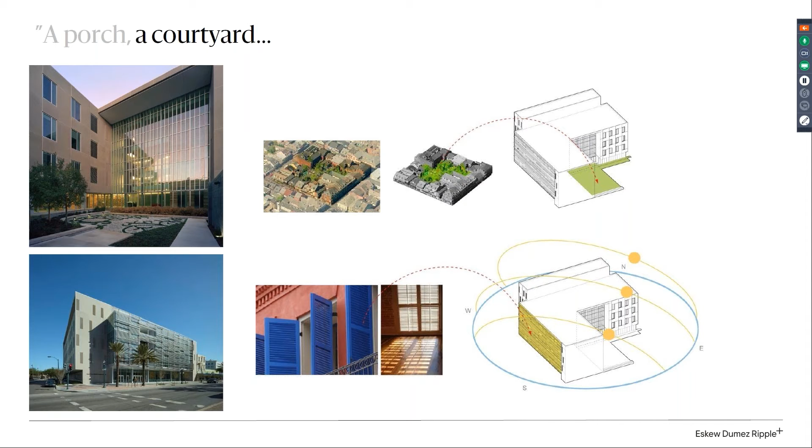And then a water feature - we took all the water that came down from the roof of the building and fed it into these water features that float along. We recirculate it with a little pump, which aerates and cleans the water. When the next rainfall comes, it overflows into a system that injects it into the parking area, which is up on crushed stone to get the elevation right. That acts as an 80,000 gallon rainwater detention facility that then drops the water back slowly into our soils.

Why is New Orleans sinking? Because we so energetically pump the water out of our streets and off our sites to make it drain. But like a sponge on your kitchen counter that's left to dry out, it gets thinner. So if we can keep the soil moist, we can keep the buildings up.

So that's an example of something that was seen as wacky - it was the first pervious concrete installation in the state of Louisiana when it was built. But when the city of New Orleans announced their new comprehensive zoning ordinance requiring pervious concrete and pervious pavings, they held the kickoff event at the Bioinnovation Center to say, look, it's here - and it was actually cheaper to do than a conventional system.

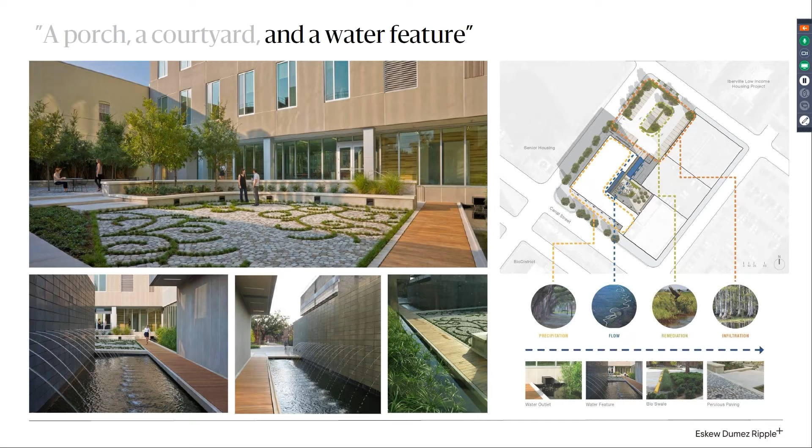So we are in New Orleans and we are of New Orleans, but we work now everywhere - about half of our work is around the country. We have two international projects: a performance hall in Sao Paulo, Brazil, and right now we're working on an affordable housing mass timber project in Vancouver, British Columbia. But in general we're working across the country in all kinds of different building types. We try to take that way of looking around and connecting people to culture and climate - that's our theme, how do we bring that into other places where we're working?

So this project just won the National AIA Education Award - it's the Thaden School, funded by the Walton Family Foundation. It's an independent school which tries to tie people back to the land in their direct experience and make their education, grades 6 through 12, stick better. It's named in honor of Louise Thaden, the aviatrix who won the national cross-country airplane race in 1936, but was born and raised in Bentonville.

It uses this pedagogy of studying how you grow things, and then the biological transformations when you cook things, in its meals program. So it's a high school with a culinary program. It teaches kids physics and engineering, and then you have to build the bicycle you use to get to school - that's called the Wheels program. And then you learn the art of writing, storytelling, and making videos - that's the Reels program. So: meals, wheels, and reels.

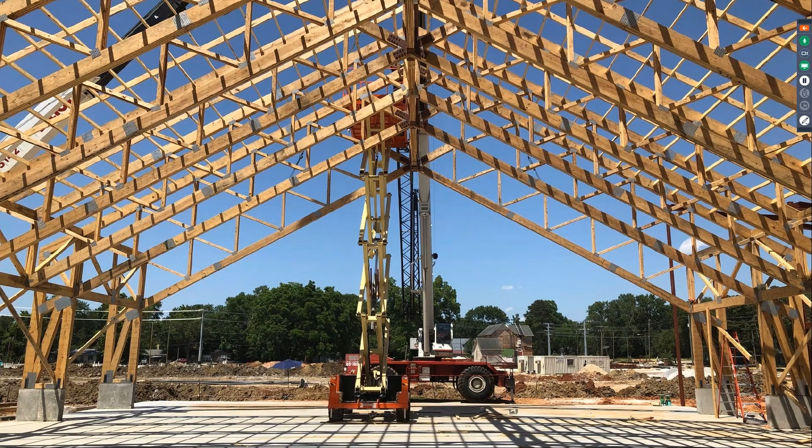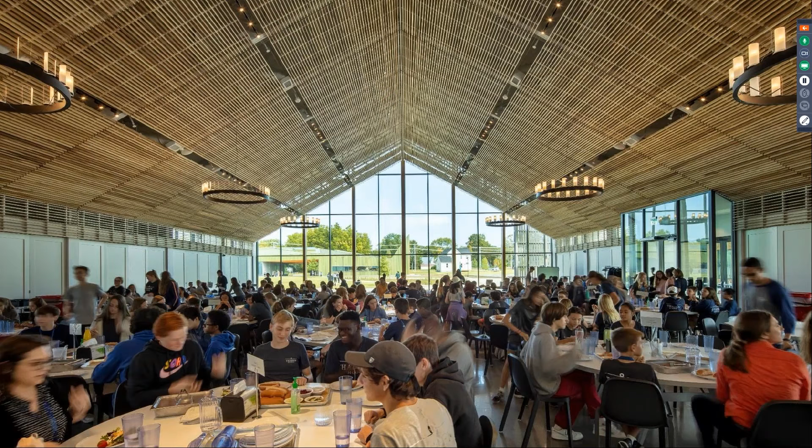What we did was look at that way of building and said, we're from New Orleans, so learning and community happen around food. So instead of building a big auditorium, what you should build is an amazing dining hall that begins and ends your day at the middle. You bring people together there. And so that turned into the gathering spot for this school, built out of cheap dimensional lumber.

So we're building this school with an energy use intensity of about one-third the typical school, with ground source heat pumps and all kinds of fancy stuff. We're building for $200 a square foot, yet producing a space of this kind of cathedral-like quality.

So, but again, we can't help ourselves - it's got a porch, a courtyard, and a water feature. And that water feature is part of the pedagogy - it's where they teach students about hydrology, about how plants actually clean the rainfall and clean pollutants out of what's gathered on the rooftop, and so on.

So we build all these different building types: live-work, residential projects, office projects, co-working spaces, learning environments - that's K-12, university buildings, research laboratories - and cultural and civic, which means things like parks and so on.

About 9 years ago, another member of staff came up with a wacky idea, saying: we have two pretty good universities in our region, but we're competing against firms from places like Boston that have a slew of great universities around them. We need to be doing research, but we can't count on the universities to do it.

So how could we promote research within our own practice? Each year it's like listening to This American Life — we pick a theme and have stories on that theme, from the world of architecture and the built environment. There are 20 great books; you read all of them and tell us which 3 we should read. There are hundreds of articles on that theme; you read them all and tell us which ones we should do. Present them to us every 6 weeks — you'll have a talk, a lunch and learn internally. Themes range from building performance to resilience to health in the built environment, tools for community engagement, building envelope design, and so on. This has really pushed us forward.

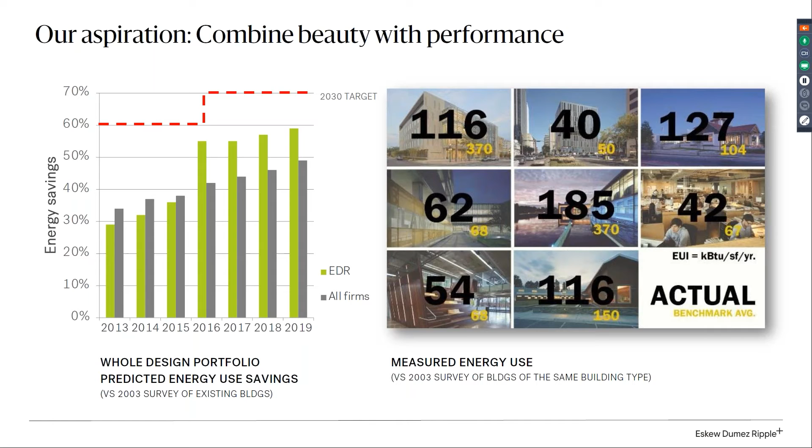So we feel good about that, but we all know, especially when I was giving the lecture this morning, the world's on fire. We're facing a lot of problems everywhere: climate, culture, the divisions in our own nation and in nations all around, putting everybody at each other's throats. We've invented an amazing set of technologies that make people mad, right? Facebook's algorithm is built so that if you use an angry emoji it gets promoted up the chain much heavier than if you use a smiley face, because they know that's a way to get people to spend more time staring at Facebook. So we've invented these perfect technologies for dividing us apart at the same time that our climate's in real trouble and we're headed towards a lot worse phase. So what are we gonna do?

Well, before we go there, I want to make you feel better, and I have to give this pitch to students especially, because students are at an age where they've seen so much bad news about where we are that they get despondent and disconnect. So I think it's important we step back and say, actually, we're making great progress on a whole bunch of fronts. It's not like we can go back to sleep, but we should take credit for what we're doing right. The first one is we are eliminating poverty.

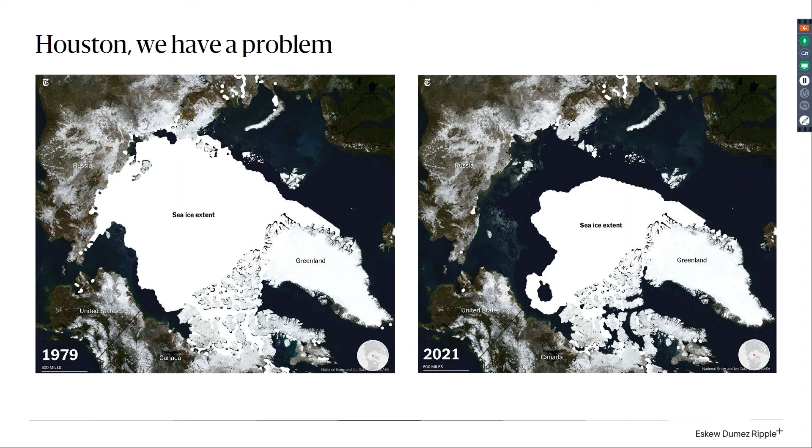As the Minister for Oil for Saudi Arabia observed, the Stone Age did not end because they ran out of stone, right? The oil age will not end because we run out of oil. The oil age will end because we come up with something better and cheaper.

The things that we've done are devastating wild populations. We're on track to lose half of all species. Bird populations, what my wife studies, bird migration, it's all connected, and bird populations are collapsing. Insect populations are collapsing faster, and it's the insects that pollinate half the food that we ate today.

And so if we don't get a handle on that, how do we get there? Now, everyone's good at making a promise, and at COP26, people started passing this around on social media: 'Man announces he will quit drinking by 2050.' So it's easy to make a commitment very far in the future that you will live a more virtuous life.

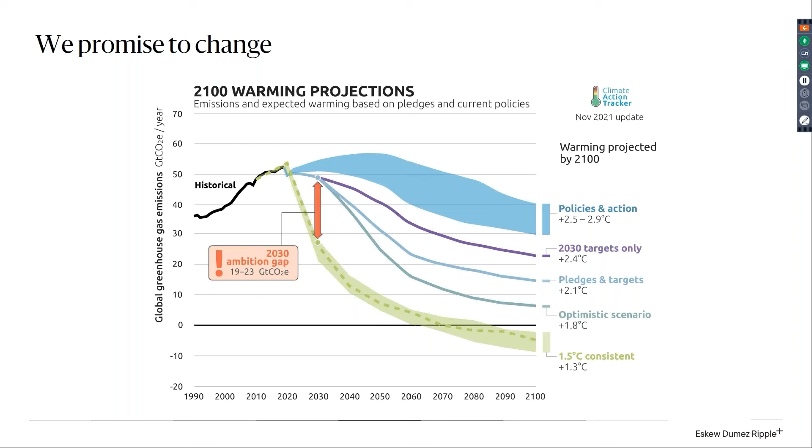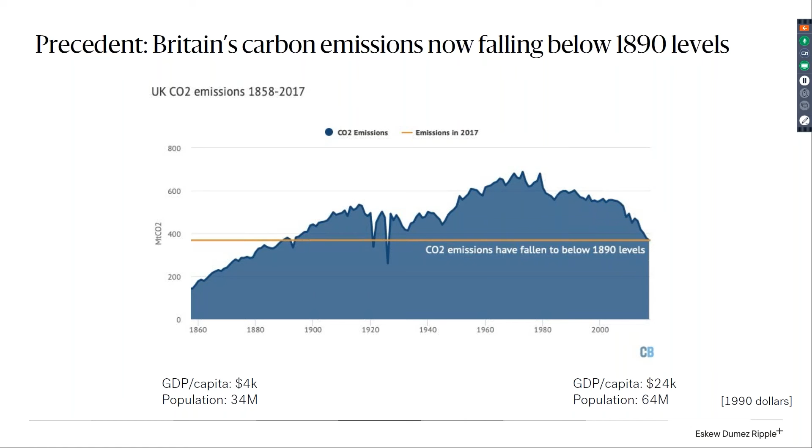In Colorado, the local utility held an auction for the cheapest source of power that could be bought in 4-hour increments. One of the competitors was running the existing coal-fired power plant they already owned and had already amortized, but just had to pay for the coal. The other one was building new solar panels and batteries, and the solar panels were cheaper. So that's what they signed up for.

This is the Kentucky Coal Museum, whose utility bills were driving their affordability concerns, so they installed solar panels on the roof. So when you visit the Kentucky Coal Museum, you're having a solar-powered experience.

And then you let them take a 2nd time and a 3rd time. The mice will learn. And what happens is with the logarithm of the number of tries, the time or the cost goes down linearly. This is called by economists the experience curve, or the log law of learning.

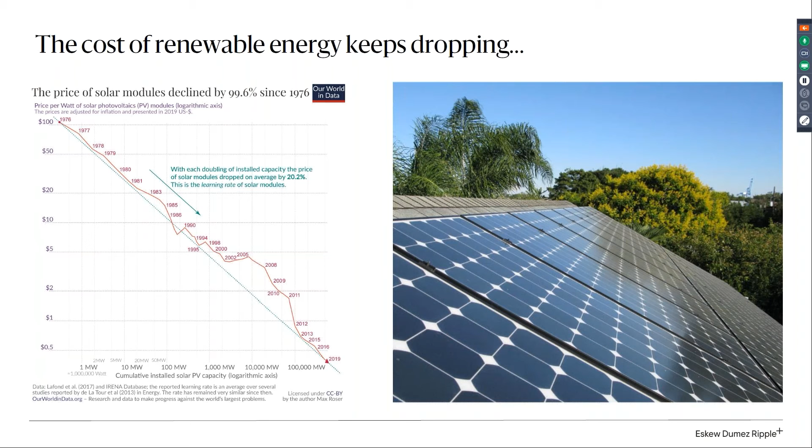So this is nothing weird or magical. This is what allows you to have more computing power than went to the moon in your pocket. It's that same kind of learning. This is what humans do, and we can be pretty proud of it.

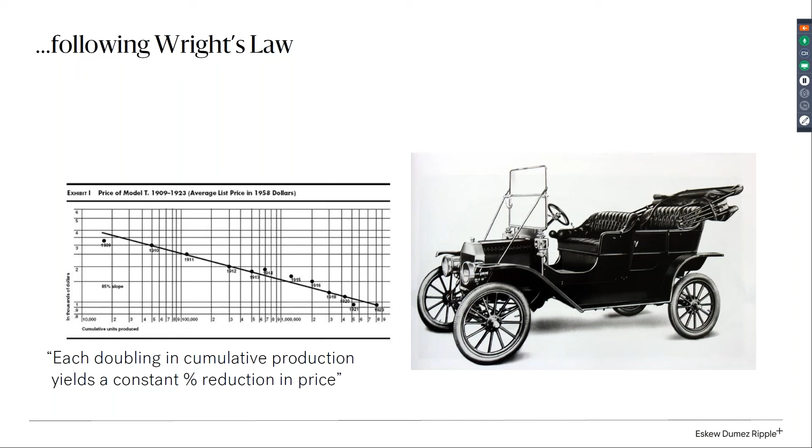So the point is, no one is building coal, and very few people are building natural gas. The future is renewable. The grid will decarbonize, not just because it's socially the right thing to do, but because it's actually cheaper, since we're all running down these experience curves.

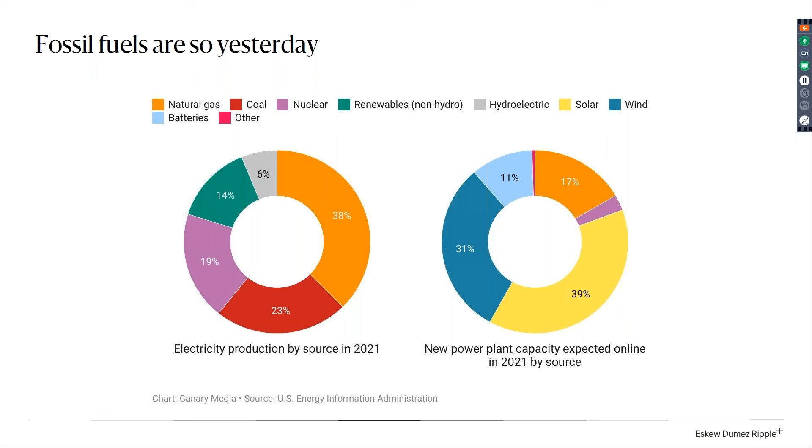So if you make an all-electric building today, even though that electricity may come from a coal plant that's slowly becoming too expensive to run, it will be a carbon-neutral building when it's done, as the grid decarbonizes. That's part of the reason you'll hear more architects saying we need to electrify everything. But waiting for that electricity to fully decarbonize is a 30, 40, 50-year process.

We can't wait that long. Luckily, strangely, architects are at the front lines of what you can change, because architects have design control over about 30, 40, 60% of all carbon emissions on the globe.

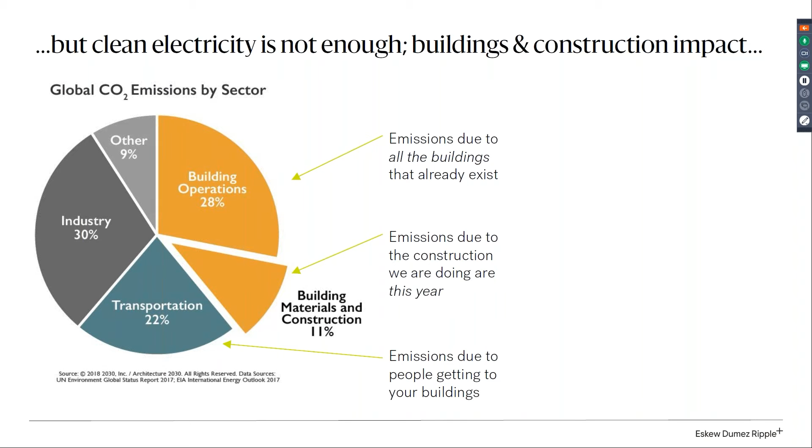And we can go through and do deep transformations of existing buildings to radically reduce their footprint and prepare them for the clean electricity future.

So 3 years ago, the last time the AIA all gathered in person, there was a floor fight. I grew up in Chicago, where political conventions and floor fights were the most exciting thing you could imagine. The board wasn't ready to go there, but a group of architects put a resolution on the floor.

The resolution said: we as members of the AIA recognize that the climate crisis is real, and that we have a responsibility and a huge, mouth-watering business opportunity to be part of the transformation, with a set of steps for doing it. That got put on the floor, a bunch of people testified, and they couldn't find anybody to testify against it. So they called the question, and it passed with 93% of the vote.

This resolution commits us as members of the AIA to advancing the 2030 Commitment in all our firms, and to transforming what we used to call the COTE Top 10, the 10 attributes of great environmentally responsible buildings. The marketing department got involved, and we're renaming this to the Framework for Design Excellence.

So how we define excellent design is not just pretty pictures. Yes, is it beautiful? Does it fit in with its setting? But also, what energy does it use? What are its carbon emissions? How does it handle water?

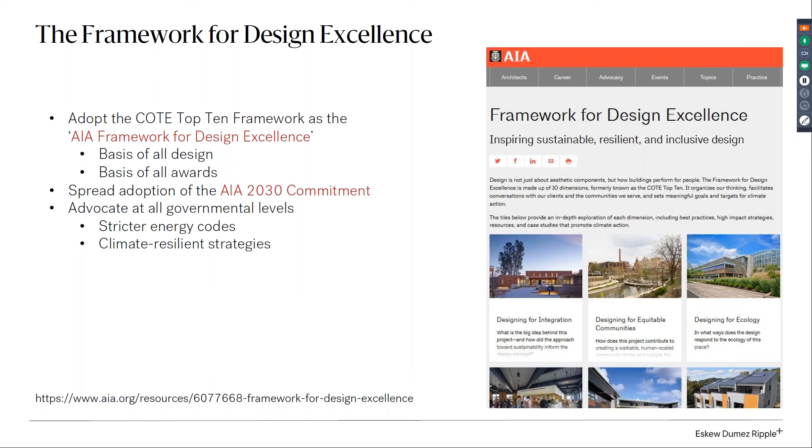And more importantly, we're all busy people. So what if I'm just doing a little project? I'm not going to win a COTE Top 10 award with this refit of a restaurant. What can I do? What it tells you is if you're busy and you can only do one or two things on energy, here's the one or two things that'll probably have the biggest impact, and so on. So it's a really quick grab bag of great resources.

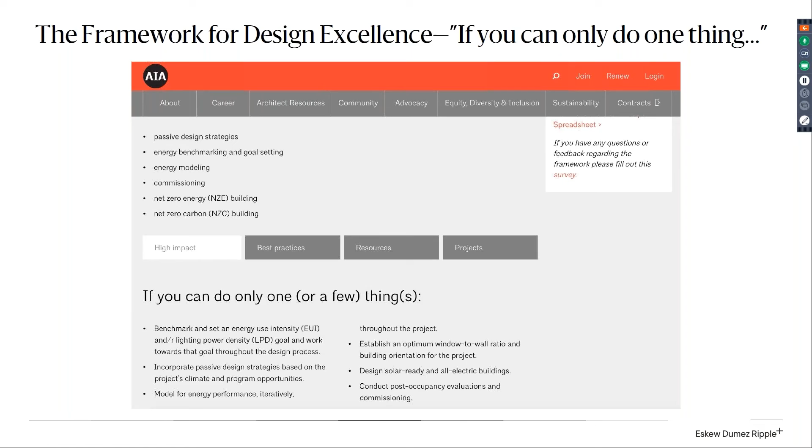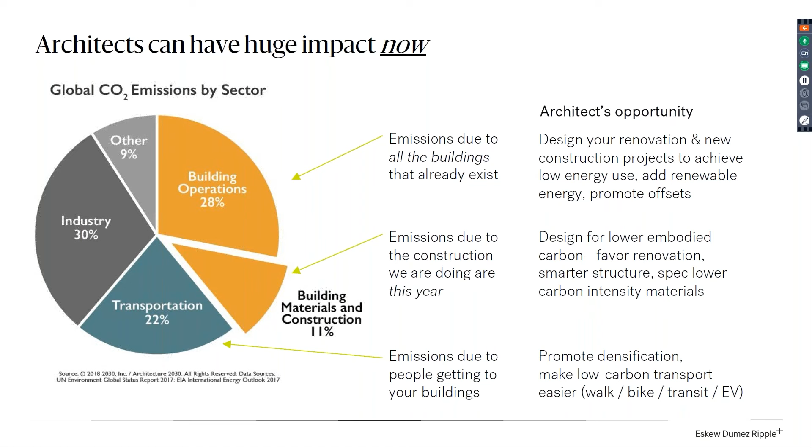So again, what are our opportunities as architects? We can transform existing buildings. We can design for lower embodied carbon, the carbon emissions from how we pick our materials, and we can make low carbon transport easier. I'll show a little bit about that in a minute.

So as I like to say, architects are powerful beings, because we are small in size. No one thinks the architects have control of 60% of the globe's carbon emissions, but we're there. And it's a giant fire hose of money being spent. And if we can nudge it a little bit through our role as kind of shepherds of the built environment, we can have a really amazing transformational effect.

So I'll give you some case study examples. The points are: design for health, deliver efficiency. We find with clients, especially in the Deep South, they're not actually interested in sustainability, but they're very interested in the health of their employees and the productivity of their employees. It just turns out that design that promotes those things makes more environmentally responsible buildings. Electrify everything, transform existing buildings, design for economy, and cut embodied carbon. I'll show you some examples of how to do that.

Promote what's being called now the 15-minute city. What if you could get everywhere you really needed to be on most days within 15 minutes, preferably by walking or biking or public transit, maybe in a private car if that's the only way.

And then I'll encourage you to recruit all your competitors. They're your best allies in what we're trying to do here, because this is going to be hard. No one of us can do this alone. And to stand up, I had the pleasure of meeting some folks here who, as architects, are citizen architects, speaking up in their communities and helping lead their communities in these transformations.

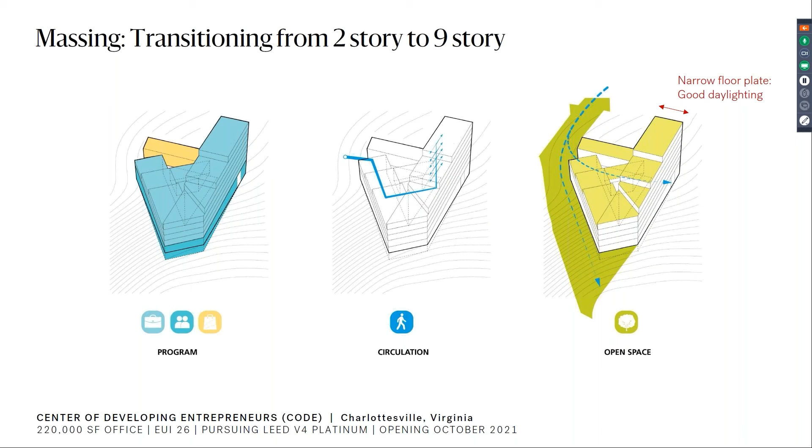And those can be outdoor gardens and so on, and that's part of the rainwater control system that met the city's stormwater management. Everyone else is building big tanks. We don't need that, and so on.

Also, we went through and designed it with operable windows. And it's always a fight. People say the mechanical engineers fight you and they say, oh, you'll de-balance my system, you'll do this, you'll do that. And we designed it with operable windows.

During value engineering, you know the process where they get rid of all the valuable things in your building, they said, oh, we're just gonna go to fixed windows. That'll save us $800,000 on this $80 million project.

And we said fine. And then the next week they said, COVID. We have this COVID thing, what are you doing about COVID? And it turns out the single most commonly recommended thing from all the experts, when they finally figured out it wasn't surfaces so much as it was airborne particles, was open the windows. And suddenly they became great advocates for operable windows again.

And then we got a call. This is a text from our PA visiting the site last week, and he said the project manager for the owner was complaining about all the headaches and deliveries and things that are behind schedule. But then he went outside and there were bees. Bees have already set up and they're using all the flowers. And it's like, we're building something amazing here. And he said that made it all worth it. So he sends me this picture of the operable windows we fought so hard for, with a little love sign next to it.

So again, because we can't help ourselves, this project has a porch, a courtyard, and a water feature.

Now, one of the questions they asked us, they got very interested. There's a lot of low carbon investing, and the investor behind this building said, how can I think about this building from its carbon perspective? And we said, look, there's a giant burp of carbon at the beginning because you're building this building. And then there's the carbon emissions that happen because the power plants that feed the building are emitting carbon.

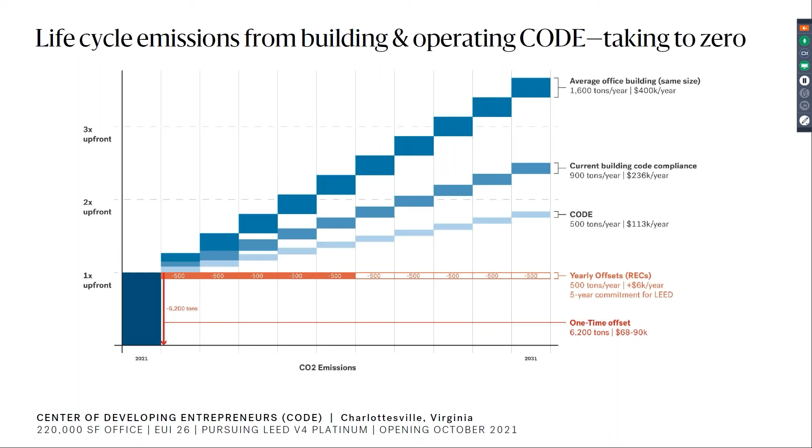And so he said, oh well then I'm just kind of right there, and I've got carbon neutral operation. He says, yeah, but what about that big burp you told me about at the beginning? And we said, well, maybe what you want to do is restore.

And so we developed a set of proposals around urban forestry, here's how much it would cost. Charlottesville, in all the wealthy sections, has a beautiful urban forest canopy, but in the poorer sections it does not. And we said, here's what it would cost you to basically do a massive intervention where you're building social equity, you're offsetting carbon, and you're making for a healthier community. And showed them what that would cost.

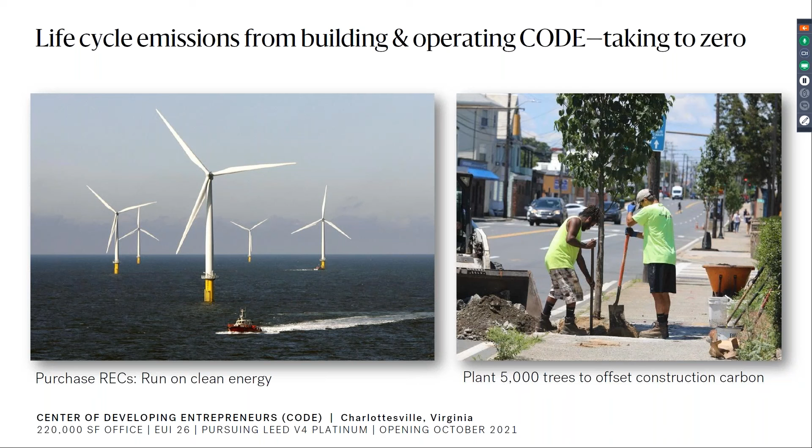And again, the cost of doing that offset program would be remarkably small, so $68,000 to $90,000 for an $80 million project. So that was new construction, that was fun.

What about ugly buildings? There turned out to be an oversupply of them. I won't say they're a renewable resource, but they sure are everywhere.

So this is in Baton Rouge, gentleman born in Baton Rouge, this is a Baton Rouge office building. This is run by the, what's it called, the Workman's Comp, one of the nonprofit Workman's Comp Corporations.

And they said, we have this problem, we don't know why. People are really uncomfortable thermally, it's too hot or it's too cold. And every time we hire a millennial, they run and leave within 2 years. We can't hold on to them. And I said, have you looked at what your office looks like? And they said, you know, the future of Workman's Comp is mostly about occupant health. It's not about like, are you hurting your back because you lifted something heavy?

We have robots for that, right? So what we said is, how about making your building the test bed for a healthy design, a healthy office that promotes activity, promotes health, and better air quality, better human activity.

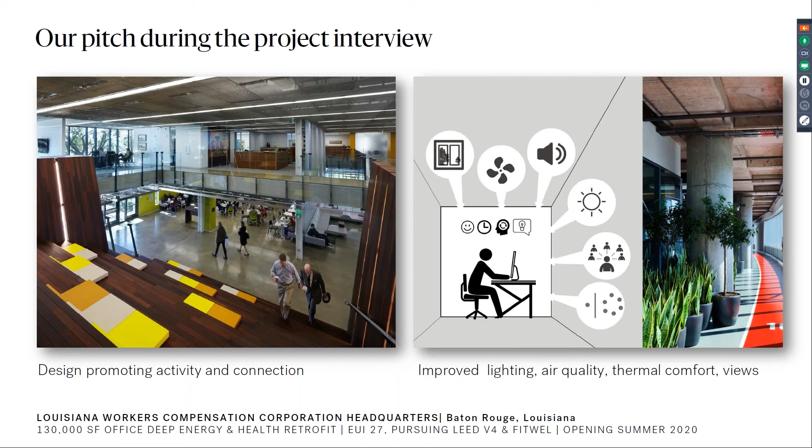So they bought that, and we told them about this crazy study out of Harvard that showed that compared to conventional office air quality, if you get rid of all the VOCs, all the off-gassing from the nasty plastics, and then you double the amount of fresh air per person, but only have it there when people are there, you can have significantly improved cognitive performance, mental function, and the cost is like $20 a year per person.

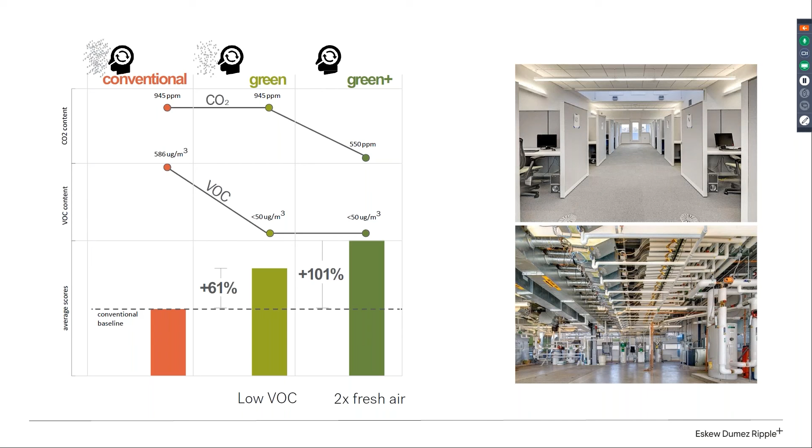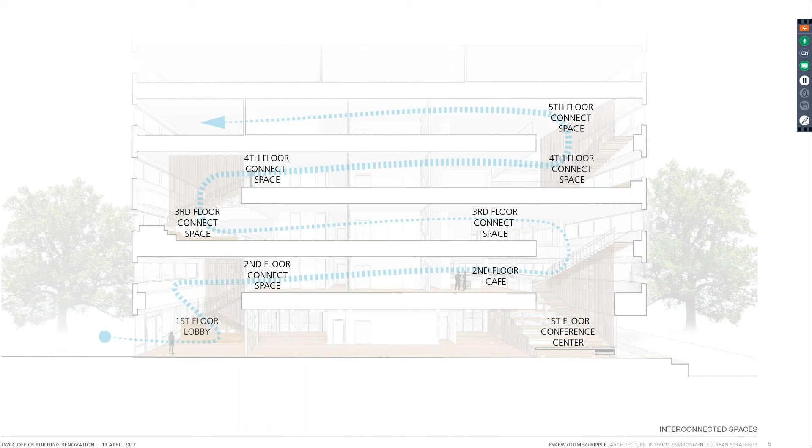And they bought that. So we did this series of interventions while they were in the building. They freed up 1 floor at a time or 2 floors at a time, and we worked our way through the building, creating a way to move through a 7-story building without using the elevator. So the president claims each morning she comes in and basically gets to tour all her departments on her way to her office on the 7th floor.

This building cut their energy use to a third of what it was before, at significantly better air quality and a significantly better experience.

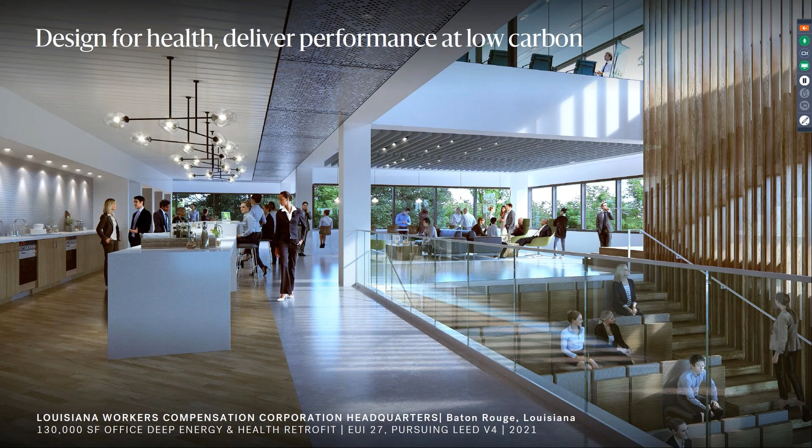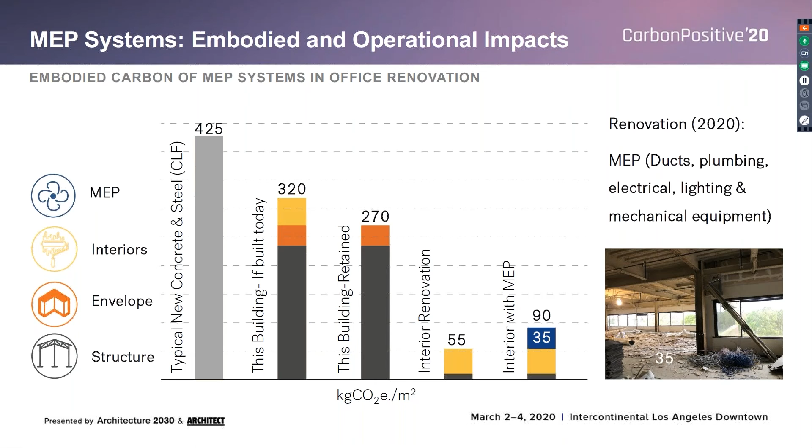But the nerdiness is, here's the carbon footprint of a typical building, constructing a new one. If we took the plans and ran it through a computer model of what the carbon emissions were for rebuilding that building, but then said, no, we're going to leave the structure and the envelope, and just rip out the interiors and redo it, and then add a fancy new mechanical system. Here's the burp from when you built it, and it's such a pig that it was all dwarfed by the operating carbon emissions per year.

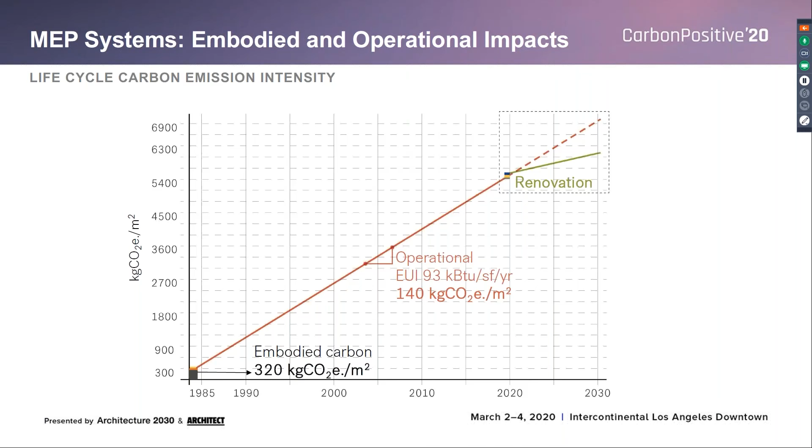This is time to the right, the horizontal axis. Here's that renovation. In less than 1 year, the building's efficiency was so much better that all of the carbon that went into all of that renovation work was saved by the operation of the more efficient building.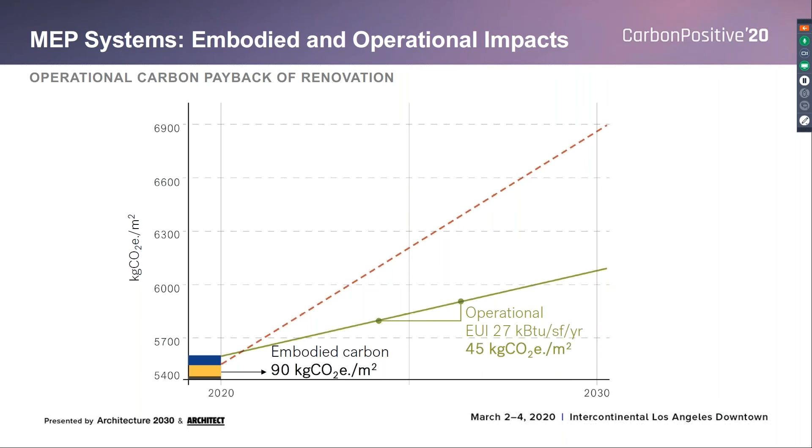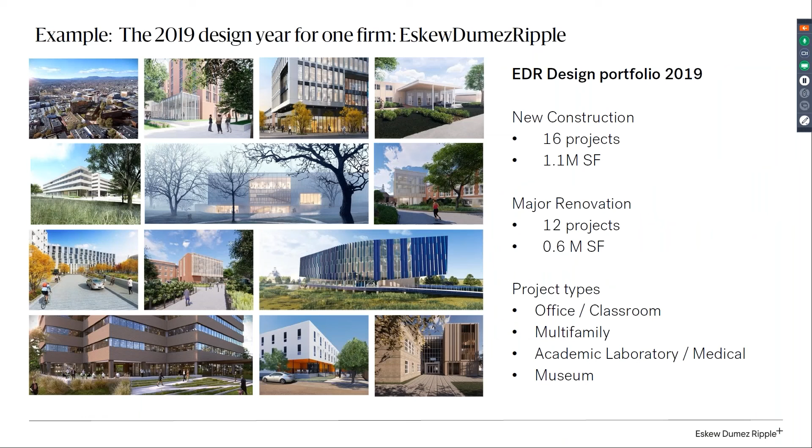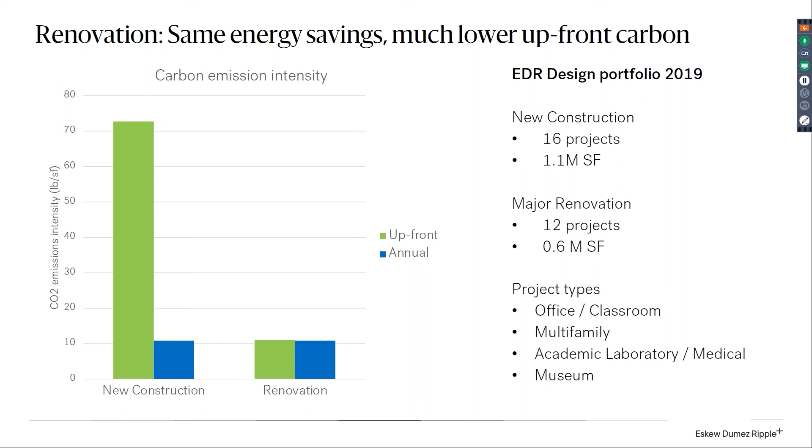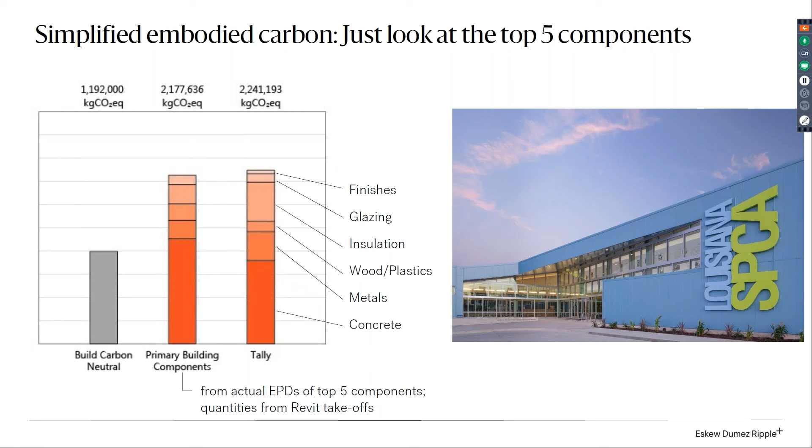You have beautiful old buildings here in Knoxville, and I know those are slowly getting restored and put back into service. So we then applied that to our whole portfolio, and what we found, no surprise, is the green is the giant burp of carbon from doing new construction, and the blue is how much they use in 1 year. I won't go through all of that, but just to say there's really simple ways, you can use fancy computer models, or you can just pick the steel and the concrete and the other 5 materials, glass, the aluminum, and use your Revit model to tell you how much you have of that, and then just multiply out by the carbon intensity and get almost the same answer from the fancy computer programs.

And this notion that we actually have choices is really happening. This is a mass timber housing project we're doing in Vancouver, where the top 9 floors are mass timber and the bottom 2 floors are concrete. And it turns out that going to mass timber actually sequesters carbon. It's the one building material built by the sun that actually stores carbon.

What we showed is we were able to produce a new building at 78% less carbon emissions than the standard way to build buildings in Vancouver.

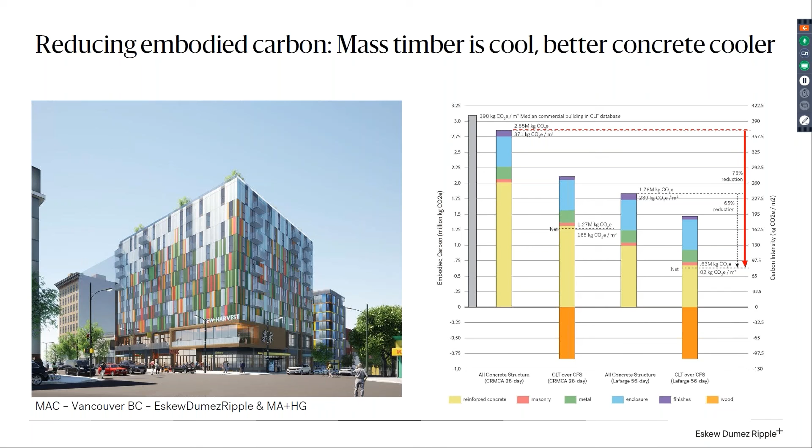And now I want to kind of apply this to you. We just took our things and scaled it, but said per employee, per technical member of staff, we divide the carbon emissions that are in our 2019 design year, the embodied carbon plus letting it run until 2035, which is the point at which the grid should be mostly decarbonized. And the answer is every technical staff member that year was responsible for 4,800 tons of carbon emissions through the choices they were making, or the opportunity for reduction.

If they could get to a 50% reduction in embodied carbon, and an 80% reduction in energy use, they would be saving 4,800 tons per year. The average American is responsible for 15 tons a year. So architects are the superheroes of carbon emissions. We are able to make these huge impacts through our own choices.

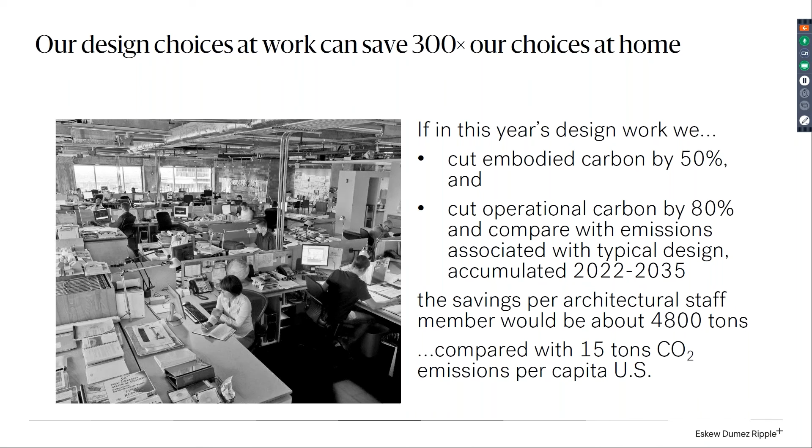Just to show, you can do this on quaint old buildings too. This happens to be my house, an 1880 house in New Orleans. It is now net zero. It has battery backup, which is really good because our power goes out all the time in New Orleans.

So I took what we learned from that. We floated through, we had a 9-day power outage in New Orleans.

All the lines into the city dropped after Ida, including the line from the generator that was in the city. They couldn't get it started because it turned out to need to have other things on the grid before it could fire up its stuff.

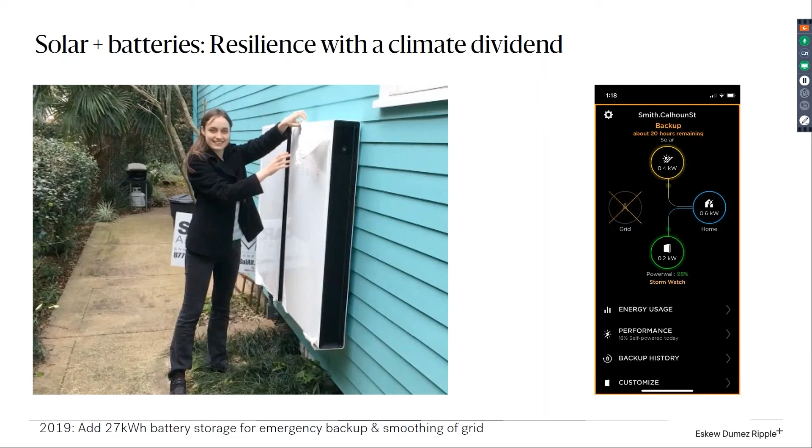And we applied that to an affordable housing project. We were building 50 apartments for $6 million, $146 a square foot, very Spartan. Then we said, as a thought experiment, could you put batteries on this? Because we're specializing in these apartments for veterans, some of them might have oxygen machines or things like that, getting help at the VA hospital. So we looked into batteries, and we said, well, we could do that, but we'll need a lot fewer batteries if we improve the efficiency.

So what would you need? We did some quick and dirty energy modeling, and on this $6 million project, for about $1 million we could actually cut the energy use in half by investing $300,000 in more efficient HVAC systems and appliances, $300,000 for solar, and $300,000 for batteries. Add all that up and it'd be about $1 million. We said, but this is just a thought experiment.

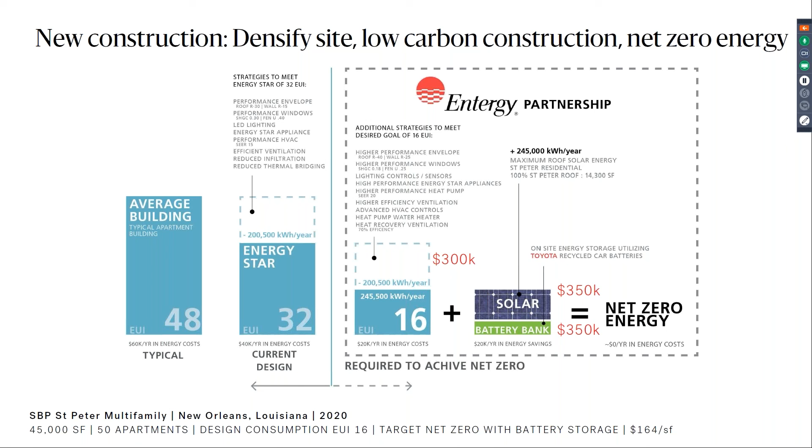And they circulated that document to the local utility and they said, where do we sign? So for a $1 million investment, they got the first grid capable net zero building of this scale in the state. So there's the head of Entergy. And this is the coverage in Fast Company. When Ida hit, the rest of the city was without power, but this one little place of 50 apartments kept going. So it's possible, we can do it today.

So, simple rules to adopt in your own practice, wrapping this up. One, for code: pretend you're using the most recent energy code, whether you are or not, whether you're required to or not. You know that the energy codes are designed about what gives a cost-effective payoff for the owner. So you can, in good conscience, say we're using these design standards, because it doesn't matter what my local municipality has adopted or whether it'll ever get enforced. By designing to this, I know that I'm doing the owner right by my investment choices.

Envelope: field test airtightness. If you haven't met a blower door crew, you haven't lived. They can help you find out why your buildings are leaking and not working right.

HVAC: whatever the question is, the answer is a heat pump. And then lighting: put your engineer on a budget, be focused. What we're seeing is the great brightening right now, where they're all just saying, oh, I'm allowed to use this many watts, the LEDs are twice as efficient, so I can just use twice as much light everywhere. And that's not actually often better. We don't need to do surgery in elevator lobbies and so on. And then do the research on appliances, which are boring but turn out to have a huge impact.

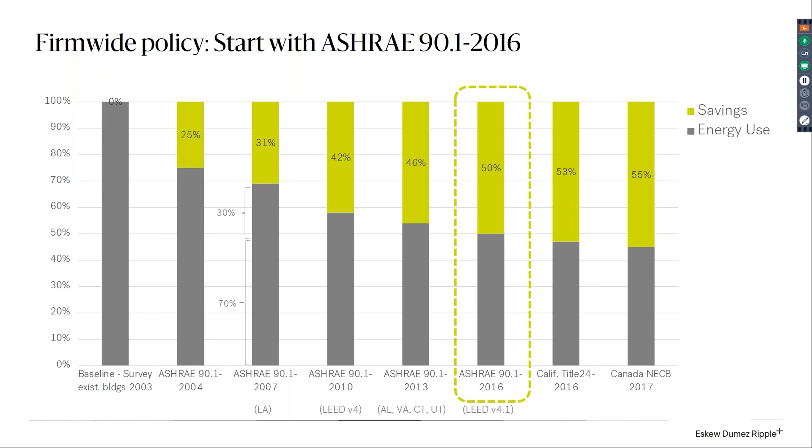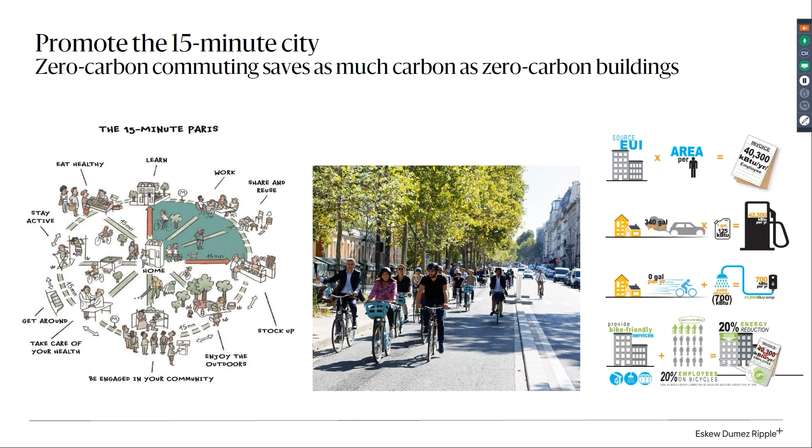Finally, promote the 15-minute city. This is a way we can build by making it easier for people who are on bikes. People make fun of bike racks, but it turns out if you've got an employee who commutes by bike, not only are they healthier and will live longer and cost you less in medical care, but the energy impact of somebody who commutes to you by bike rather than car is the same as if all of your employees commuted by bike or walked to work—that would be the same as being a net zero building in terms of the carbon impact. So to the extent that you can make it easier for people to bike or walk, you're accelerating that transition.

And then finally, competibuddies. So we're all competitors here, but we're also friends—that's why we're enjoying a meal together. This is too much work for any one of us to take on. We're all going to figure out tricks that work for our kinds of building types or from our project experience. If we share what we've learned, then we can double up and accelerate and raise the ground. And then the only thing we're really changing is the standard of what clients are looking for and what they say can be done.

If you haven't signed up for the AIA 2030 commitment, please do it. It's just a commitment that says you're getting on the pencil diet - you're going to record what you're doing. It only takes a few hours a year of staff time for most firms to track, but you get this wealth of information about how your project is doing and how it could do better. We currently have about 1,000 firms signed up. If each year, when you join, you commit to recruiting one more firm, it's kind of a good pyramid scheme - we'd go from 1,000 to 2,000 to 4,000 to 8,000. There are 20,000 firms in the AIA. By 2025 or 2026, we could have 100% coverage.

My pastor when I was growing up gave this annual sermon called Take a Sinner to Dinner - you pick someone who you don't think is at your same moral level and you have a meal with them. I think I see a few sinners here. I'm glad you're all enjoying the meal. But please, this is how we're going to transform the planet. I don't know if everyone will realize when it's done that architects did it and led the way, but we have the opportunity. It's never been a better or more powerful time to be an architect. Thank you.